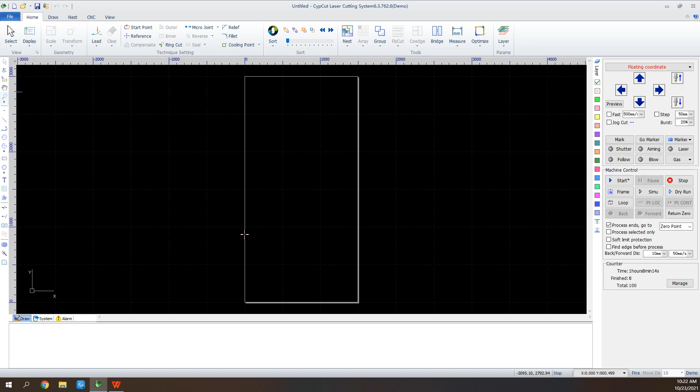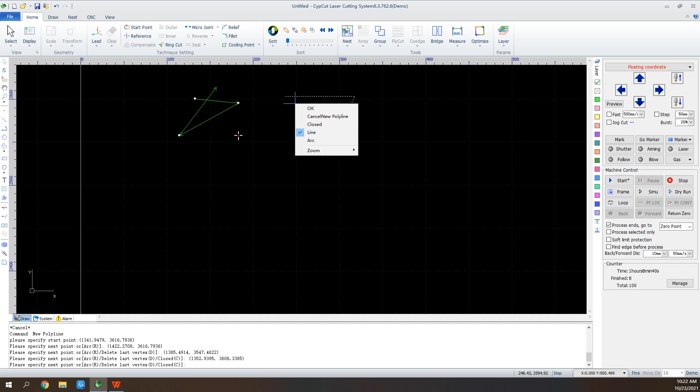We can draw lines, polylines, circles, rectangles, and we also have standard parts.

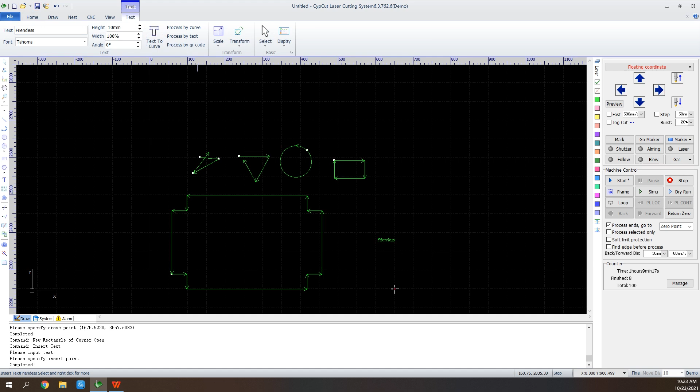And we can insert text here. If it's too small, we can make it bigger.

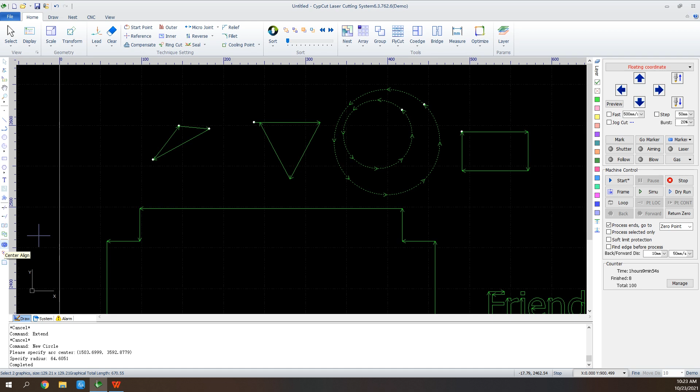And down below, we have trim, extend, and if we have 2 circles like this, we select them and click the center align. They will be center aligned.

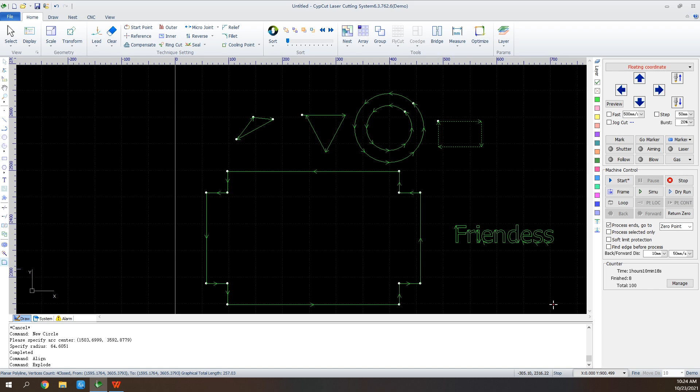When we explode a graphic, it will be turned into several lines. And we also have the fillet. Select the graphic and click the fillet. We will get round corners.

The first 5 functions of this toolbar are selection, node editing, sequence editing, dragging, and zooming. Node editing is used for fine-tuning graphics. Select a graphic and click the icon.

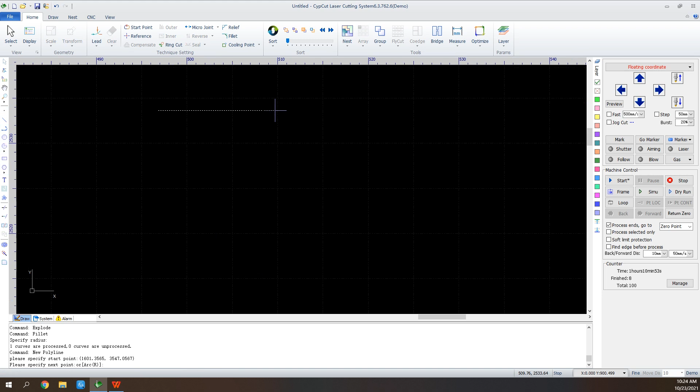For example, let's firstly draw some irregular graphic. Select the graphic, click the icon. We can see the nodes of the graphic. Drag the node to adjust the graphic.

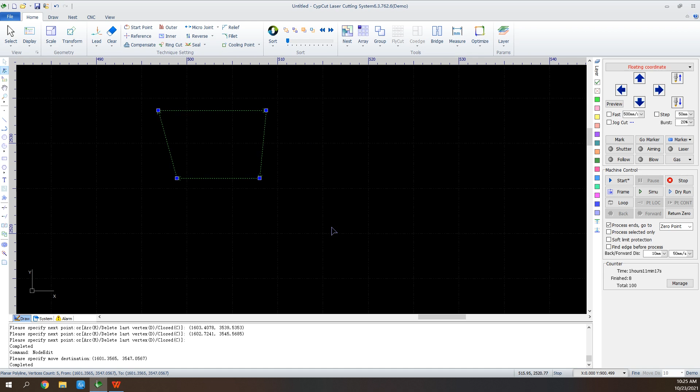And we can edit cutting sequence manually. If unsatisfied with the default ones, it would be changed following the sequence we click.

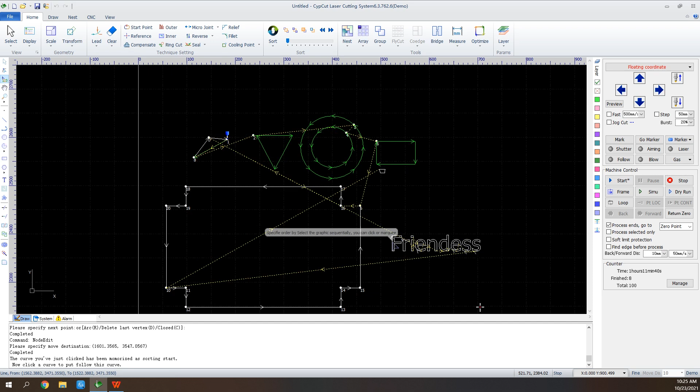As for the last 2, drag to translate the view or zoom in it as we want.

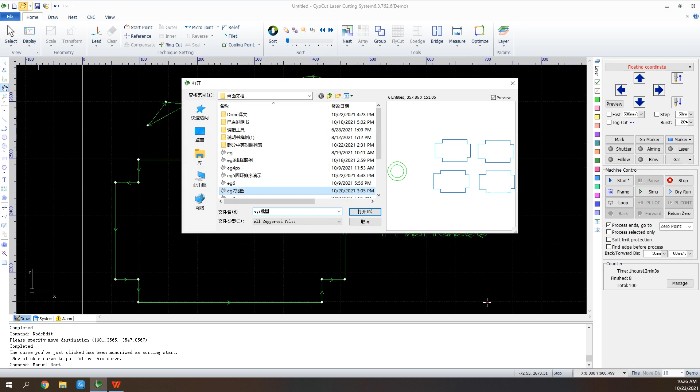In this View module, click Select to get the drop-down menu. We use Quantity Modify to modify the graphics of the same size and layer.

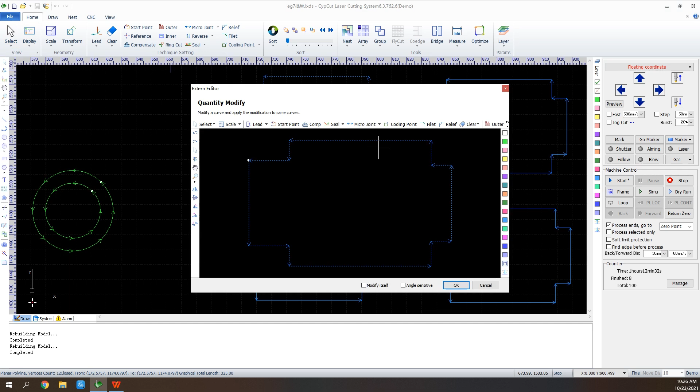First, select a graphic. Then we click the icon, and we can give instructions in this interface. For example, we set a lead. Click OK, and we will get 4 leads for each one of the 4 graphics.

There we also have Disable Fast Drag Copy. This is for avoiding misoperation on an input file. Now we cannot drag the graphic.

Also, we can choose graphics by layers or by types. And we've got 2 ways of frame.

Press and hold from left to right, a blue box will appear. Under this condition, only if a whole part was framed in the box will it be selected.

And if hold from right to left, there will be a green box. As long as part of the graphic was framed in the box, the whole will be selected.

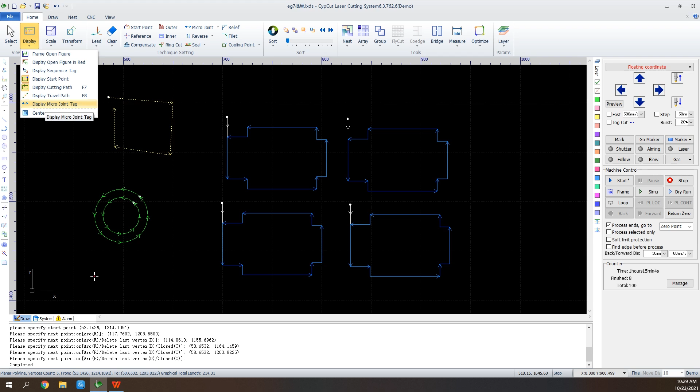And let's draw something new. Select the graphic and click the scale to modify size. Now, as we can see, the ratio is locked. We need to get it unlocked first.

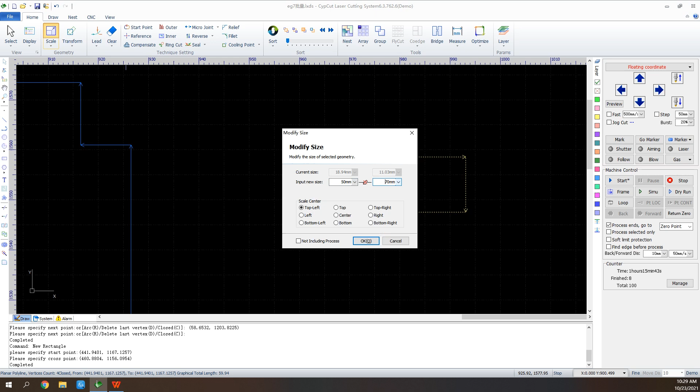Say we want a rectangle of 50 times 70. Input dimension here and we will get a new one.

Quick modify the graphic size can be realized as well, 2 times bigger, half times smaller. And we can find ways in transform to translate, align,

Flip or rotate the graphic.

If we have graphics like this, we firstly select them and make it left align. Flip vertical, or we can rotate it.

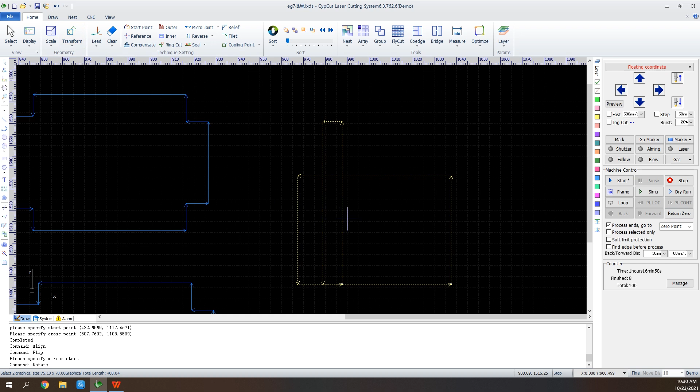And when we laser cut parts, we make the cutting path start from several millimeters away from the part. This way it could get cut much better. The distance is what we call the lead.

When we set a lead, first we select the graphic, then click the lead to set the parameters. 3 lead types to be chosen: line, arc, line plus arc, and here we can set the length and angle.

If we need a small hole to remove slag when we are cutting stainless steel, check this box. As for lead position, we can choose to introduce from part tip or long edge, just according to our needs.

Generally, we recommend an angle of 0 degree for lead from part tip, but an angle of 90 for that from long edge to get a best performance. When we need to change lead type but remain the original position, check this box.

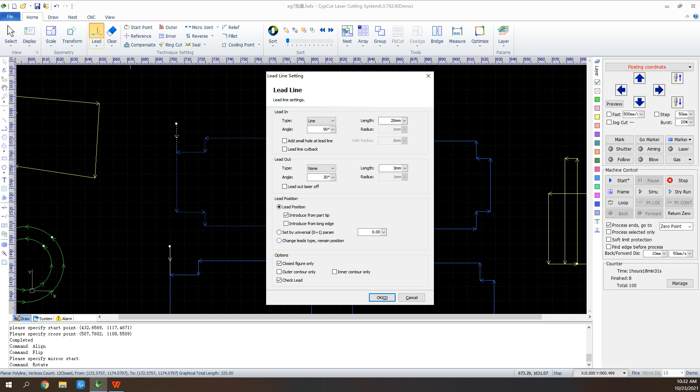And if we don't want a lead, just clear lead to delete it.

And we've also got a bunch of other functions here on the right, the technique setting. First, we have start point. When we feel like changing the start point that automatically generated, just click the icon.

Then a small square will appear as the cursor moves on to the graphic, and we can change the position to wherever we want. As for laser cutting, there exists a kerf width. We can use the compensation.

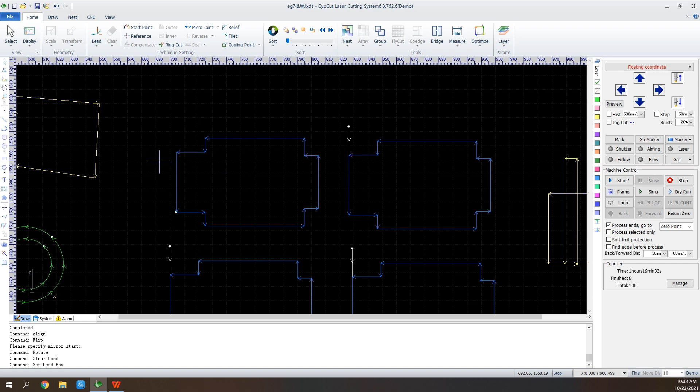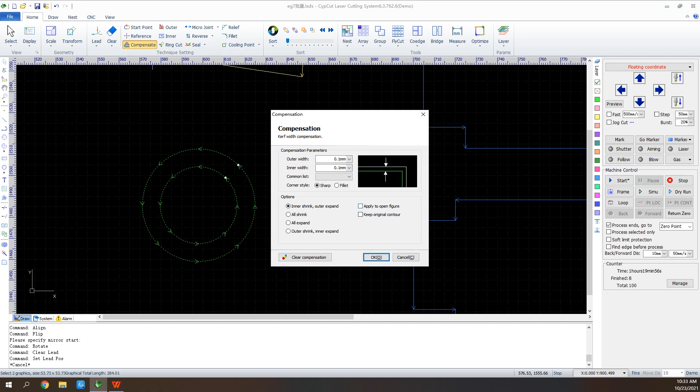And if it's a graphic like a ring, we check inner shrink and outer expand to make up for it. In this case, we can get parts cut more precisely and get the size we want. Now we get the compensation.

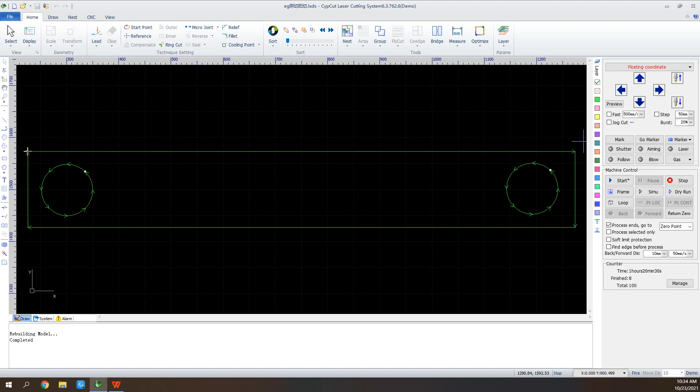When we cut co-edge graphics like this, inner and outer contour may get wrongly identified, say when we add leads. As we can see, the leads are invalid, so let's identify inner or outer contour. Now this is a normal part.

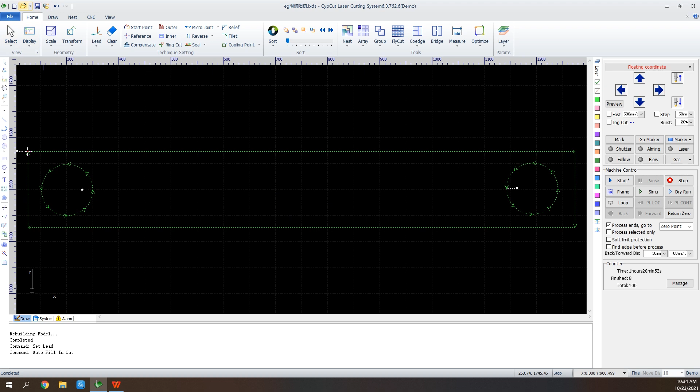Sometimes when we cut a long ribbon of sheet metal, it may get lifted during the cutting and hence get in the way of the cutting head. Therefore, we need to add micro joints to avoid this situation. Here we have a micro joint.

We've got manual and automatic micro joints, two ways. Click the icon and add joints to where we want, or choose to automatically generate the micro joints.

Press Shift on the keyboard and click the micro joints. We can clear them if we don't want it.

And besides, as the default cutting path goes clockwise, it goes clockwise. When we come to the bottom line of the second oblong, the sheet will vibrate for lack of support.

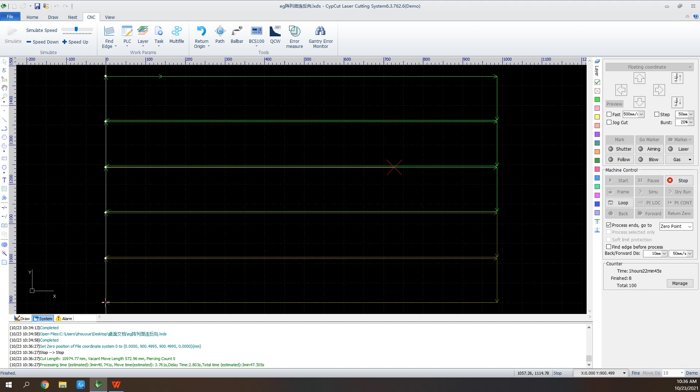To solve the problem, we use the feature reverse. We use the reverse to change the direction of the cutting path. So now, as the sheet gets better support, it will stay steady while being cut.

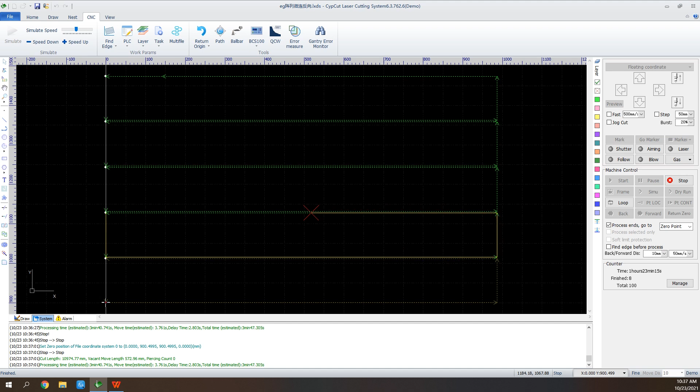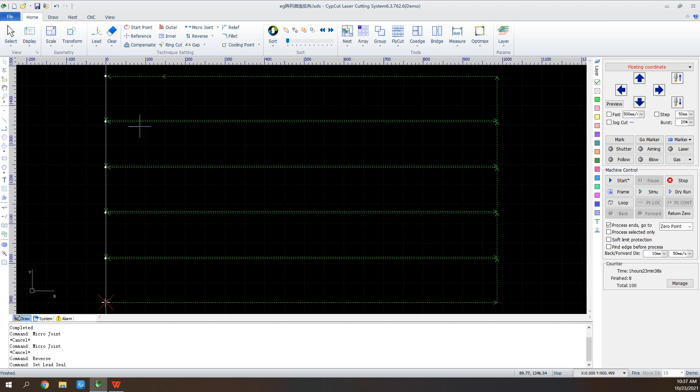Down below, this is the gap feature here. In the drop-down menu, we can see the gap. Select the graphic and click it when we need to set a gap at the end of the cutting path. Here is the gap. On the control rail, we can seal the gap if we don't want it anymore.

There are also overcut and multi-cut. Overcut is for making sure the whole part was machined, and multi-cut is for an obvious marking.

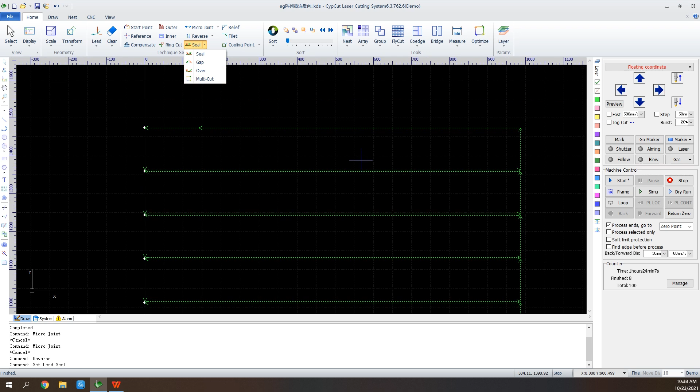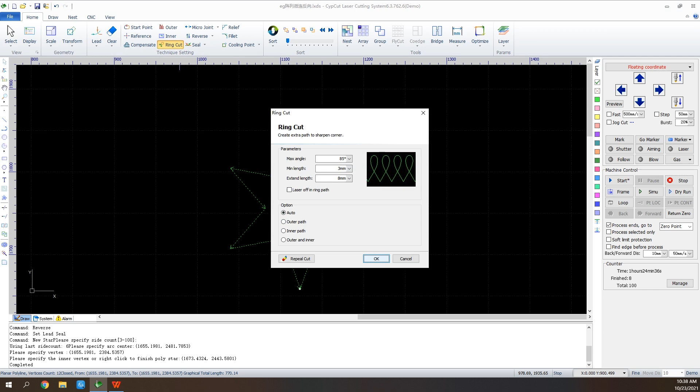Sometimes we need to cut graphics with sharp angles. To ensure a good performance, we use the feature ring cut. As always, we click to set parameters accordingly. Now we get the ring cut.

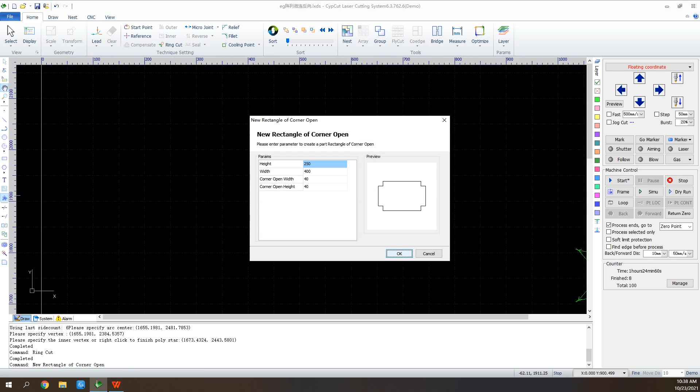And when it occurs to parts with a corner to be bent in the next step, like a standard part like this, we can set the relief here, manually.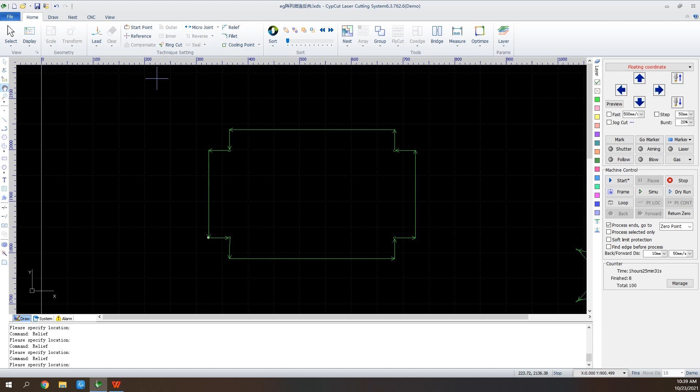And this fillet feature is different from the one at the bottom left. We can add fillet one by one according to needs.

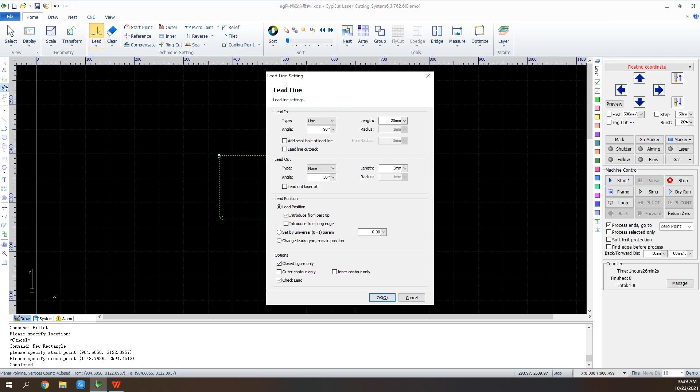When we cut thick plate, at the corner of a graphic or the lead in, from the tip we need to get laser off to stop cutting and blow to cool the point in case the part gets melted. So we can use the cooling point feature.

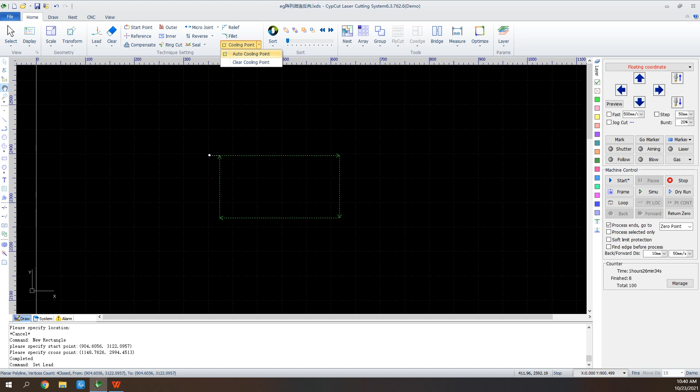We've got two ways: automatic cooling point and manual ones. Choose auto cooling point, and we'll get every corner and the lead-in position a cooling point. And if we click this clear cooling point, all but the one at the lead-in can be cleared.

This one needs to be cleared manually. So we click the icon again, press Shift, and click to clear the point.

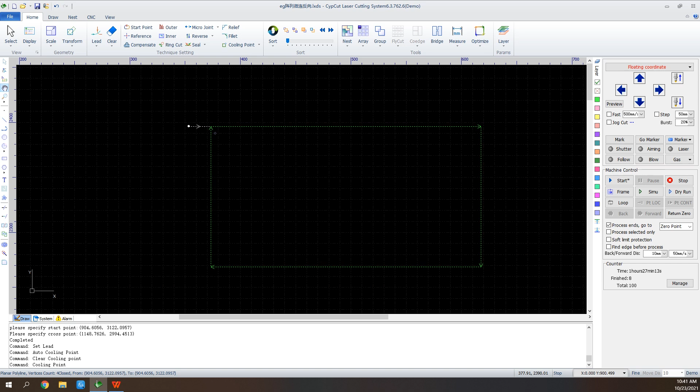And at the end, let's focus on the reference point. As we can see, on the machine panel, the red cross represents the position of the cutting head at the moment. The white cross is the mouse, and this one is the reference position.

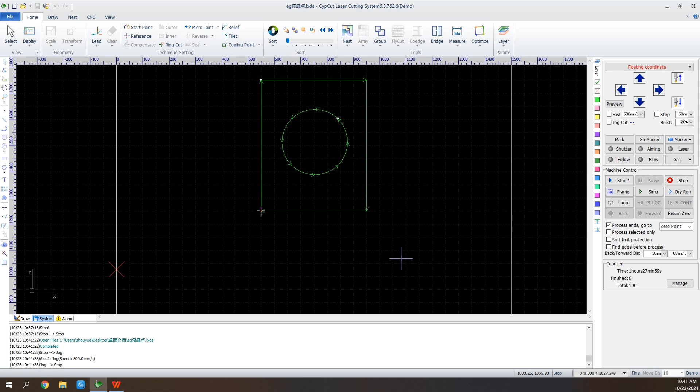The reference point means the position of part 0 in relation to that of a whole graphic. When we set the reference point at the bottom left, the graphics will show at the top right of the point, as we can see here.

And in the floating coordinate mode, the cutting head and the part 0 position are at the same place. So the machine process starts at the top right. If we set the reference point at the bottom right, the machine process starts at the top left of the point.

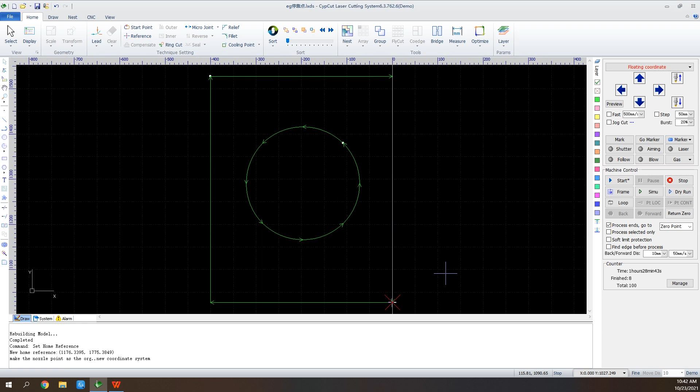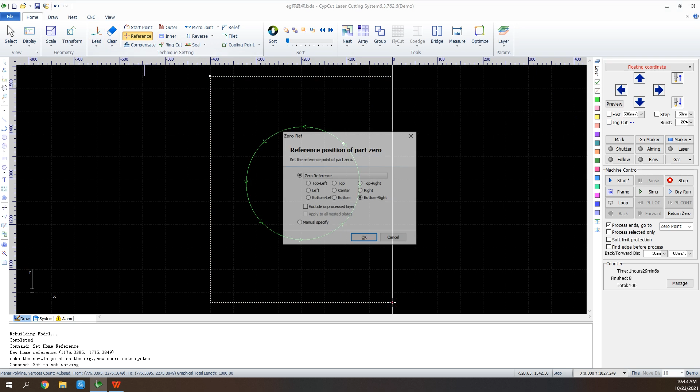There we've got exclude unprocessed layer. For example, there we have 2 graphics, and we now set the rectangle as not processed. And we check this box. The reference point will be at the bottom right of the circle. It means it will start cutting from this circle instead of the rectangle.

And though we can manually set the reference point, relative zero reference is the common choice. The floating coordinate work with zero reference can realize a flexible production.

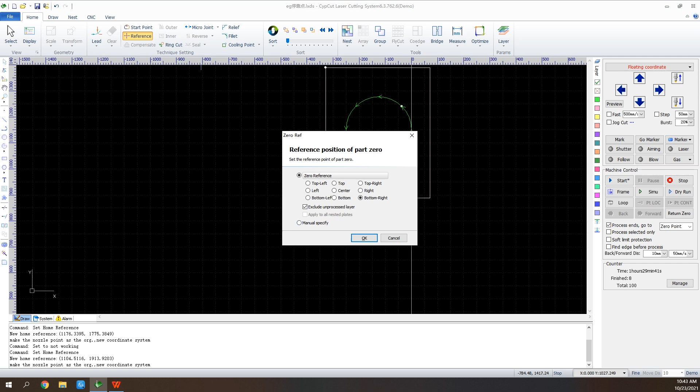So that's for today. We've learned the features in view, geometry, and the technique setting modules, and we know how to draw simple graphics. Remember to practice. See you next time.